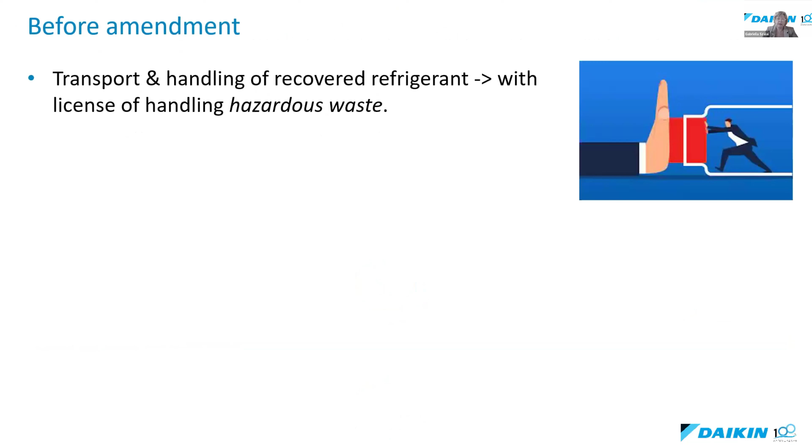Before the amendment, transport and handling of recovered refrigerant had to be done under license for handling hazardous waste. This actually meant a real bottleneck for circularity of refrigerants. Installers were reluctant to handle especially smaller quantities of recovered refrigerants due to uncertain legalities and high additional transport costs. Reclamation and disposal facilities did not accept recovered F-gases without a special transport certificate, since it needed to be transported as hazardous waste, and this also caused an economic feasibility bottleneck, since reclamation and disposal organized only over a certain volume of recovered refrigerants, which could not actually be collected due to the uncertainty of the legal situation.

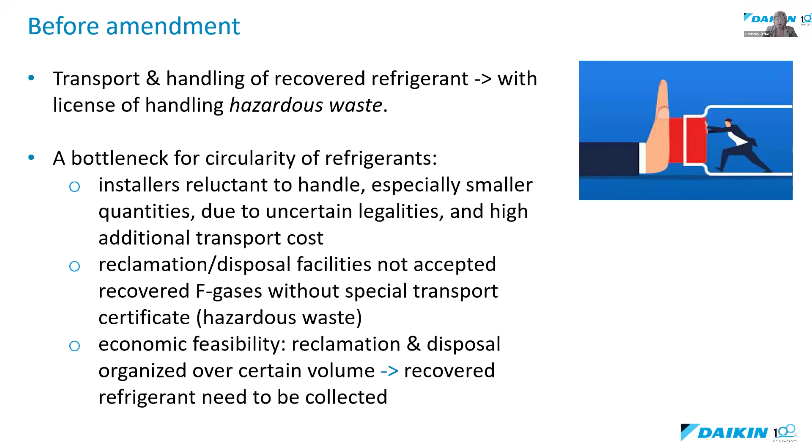Even with the previous F-gas quota phase-down, a deficit of virgin refrigerant could be anticipated according to EPEE, the European Partnership for Energy and Environment, HFC outlook model. With the augmented F-gas phase-down, a serious shortage could be expected, especially for servicing and maintenance of the existing RACHP bank. The Hungarian national expert team understood this issue.

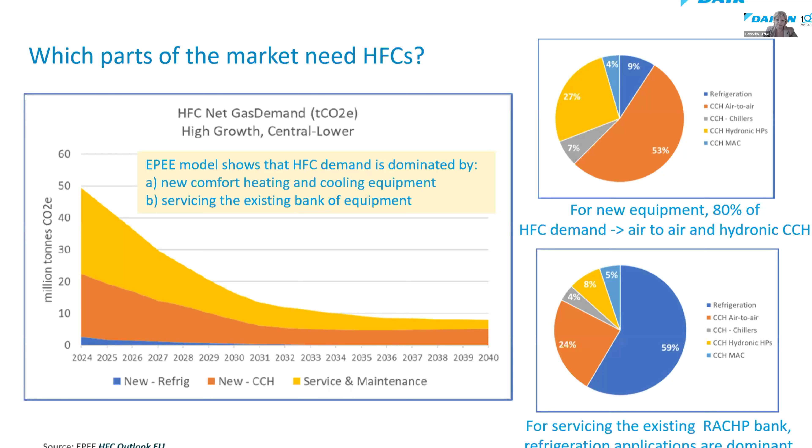They agreed that member states should facilitate the recycling and reclamation of HFCs. Recycled and reclaimed gases are outside the scope of the quota system, and therefore can assist market needs. These activities relate to the main environmental targets as well, including climate protection and environmental protection.

Advocacy efforts were made under the umbrella of the LIFE Plus program, co-financed by the European Commission. The consortium consists of 4 entities: Daikin Central Europe and Daikin Europe, together with the National Technical University of Athens and a non-profit organization called Med4Energy.

And as promised, I would like to give you an insight into how the advocacy process has been done in Hungary.

Independent legal consultants assisted the business sector, and this legal consultant was employed under the LIFE3R project. The consultant made a legal environmental assessment, which is a key part of the advocacy process. The assessment compared waste framework regulation and F-gas regulation, and this consultant was also involved in shaping the legal proposal. I initiated the advocacy process as Daikin Advocacy Manager under the EU project, and I was directly involved in the whole negotiation process.

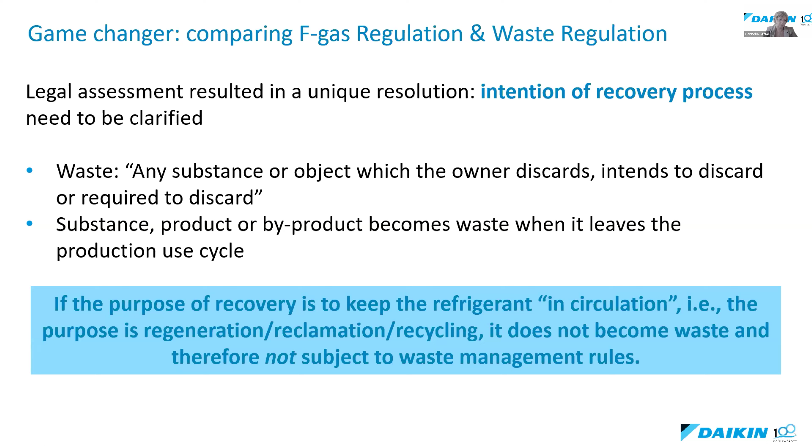Waste is any substance or object which the owner discards, intends to discard, or is required to discard. A substance, product, or byproduct becomes waste when it leaves the production use cycle. That means if the purpose of recovery is to keep the refrigerant in circulation—for regeneration, reclamation, or recycling—it does not become waste and is therefore not subject to waste management rules.

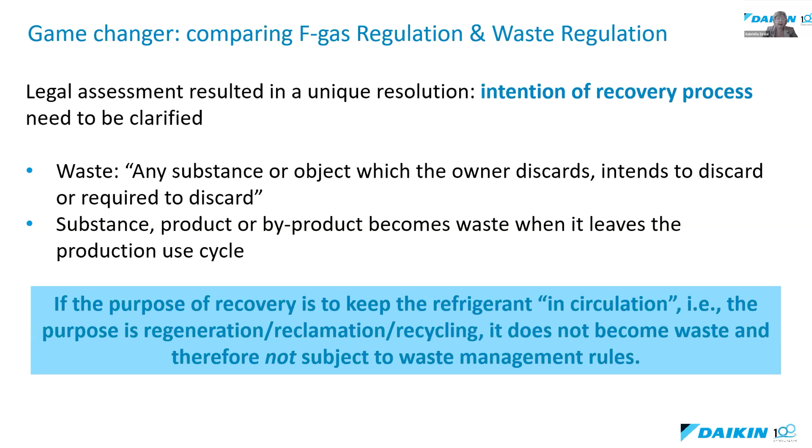This was a very important statement, which was accepted by the Hungarian expert team. That was the key behind the change of legislation, because the Hungarian national expert team agreed that if the purpose of F-gas recovery is keeping the refrigerant in circulation, this activity should not be regulated under waste management, but via F-gas implementation rules.

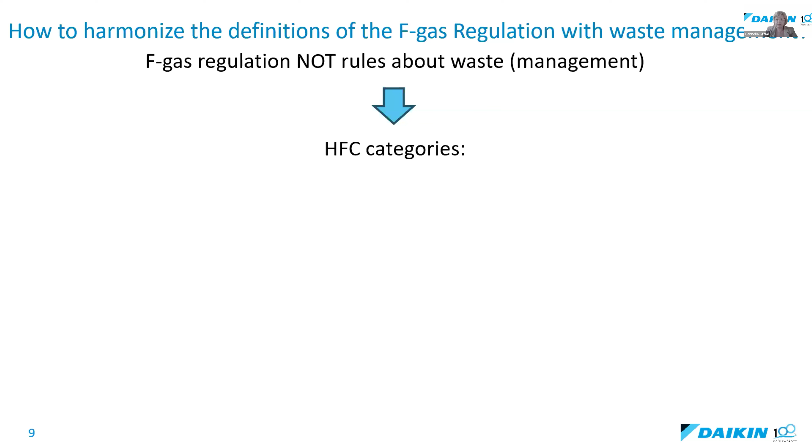HFC categories include virgin substances, recycled substances, reuse of recovered fluorinated greenhouse gas following a basic cleaning process, reclaimed substances which match the performance of a virgin substance, or destructed substances where fluorinated greenhouse gases are permanently transformed or decomposed into substances that are not fluorinated greenhouse gases.

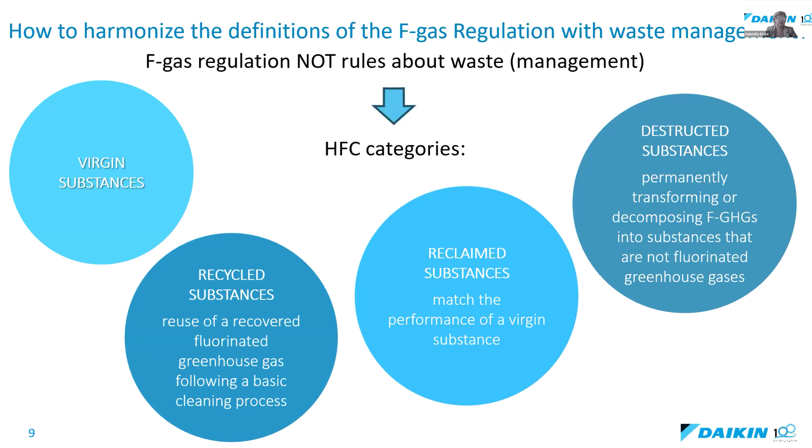It's upon the decision of the owner what should be done with recovered HFCs, and this decision determines the legal status of the refrigerant.

So, if the recovery of refrigerant is for reclamation purposes, their transport for reclamation is regulated as a non-waste activity, which is a significant improvement for the environment.

So this is the only case when the handling of recovered refrigerant remains the same as before. Recovered refrigerant is only handled as hazardous waste if it cannot be kept in circulation.

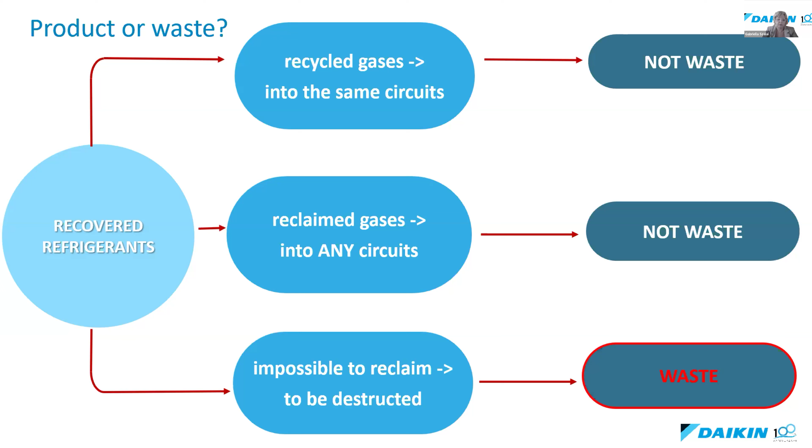So what changed? The legislation is consistent: fluorinated greenhouse gas can be transported as product, should it be recovered for reclamation purposes.

The amendment sets a deadline of 2 years from the date of recovery for the sale or transfer of refrigerant in this case, thus promoting efficient recycling of recovered gases.

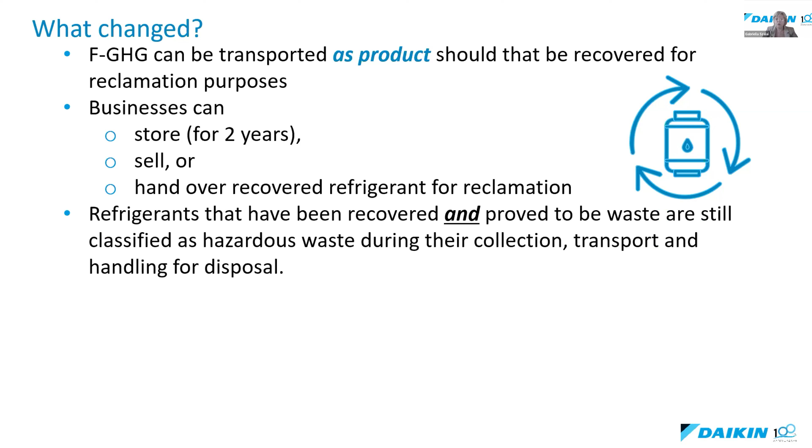The collection, transport, and disposal of recovered refrigerant that becomes waste are still subject to hazardous waste handling rules. However, in cases where companies only perform collection or transportation activities without handling gas, it is ensured that they will not have to be F-gas certified in the future.

Accordingly, the amendment creates a registration category called 'collector' that allows collection and transport without qualification, in addition to those who are F-gas certified.

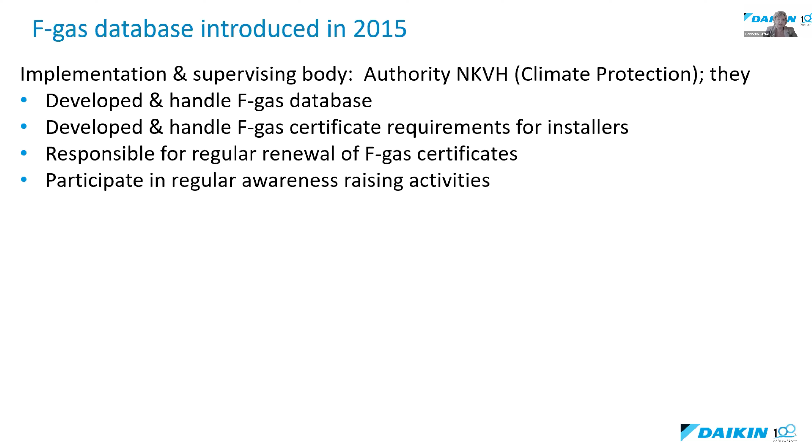When I noted that the legislation is consistent, this statement also includes the tracking of refrigerant routes. In Hungary, there is a mandatory, centralized, government-funded F-gas database. This database, introduced in 2015, is implemented and supervised by the Authority for Climate Protection. They developed and handle the F-gas database, developed and handle F-gas certificate requirements for installers, are responsible for regular renewal of F-gas certificates, and participate in regular awareness-raising activities as well. The F-gas database is also used for tracking units and refrigerants.

Routes of virgin and recovered HFCs need to be notified in the database, and this rule will be extended to HFOs and non-fluorinated refrigerants as well. Registering new HVACR units charged with HFCs and HFOs need to be notified in the database. This database also allows tracking the life cycle of this equipment.

E-logbook activities, including required leak checks, are also notified in the F-gas database, and this will also be extended to HFOs under the new amended F-gas regulation. Units also connect service and recovery activities — the F-gas database connects service and recovery activities to units.

And all these current requirements are expected to be extended to non-fluorinated refrigerants from next year on, including training requirements for installers as well. The F-gas database needs to be regularly updated — maximum 8 days after any database-related activity it needs to be reported — and leak checks are mandatory according to F-gas regulations. Missed reporting of mandatory activity is fined by the Authority for Climate Protection.

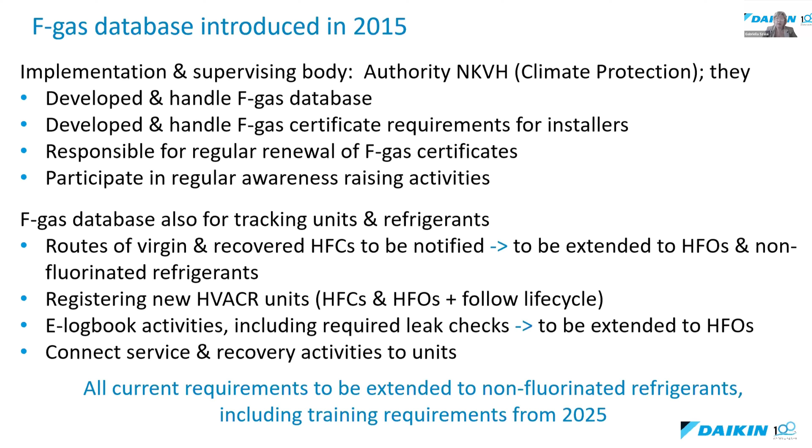With the amendment, the implementation rules and changes in the F-gas database also added concerning reporting on unknown recovered blends. That means that unknown blends, for which the exact composition is not possible to determine, are allowed to be set at a later date when the proper composition can be noted, and then it can actually be notified in the F-gas database as well.

Amending the regulation is a significant step for refrigerant circularity, but awareness raising and market and stakeholder education is also very important. Installers and service companies need time to adapt and also need credible sources to learn from. Therefore, extensive awareness raising is still necessary. The Hungarian expert team also understood this need — they regularly participate in events and conferences, during mandatory installer trainings as well, and they are actively part of market education, which is very important for all installers to understand the amended rules.

But we also experience new business opportunities occurring for refrigerant circularity. For example, a leading reclamation facility increased its capacity — formerly it reclaimed only non-flammable, A1 type refrigerants, and now they have extended their service for A2 type refrigerants as well. We also noted that a new reclamation facility launched in Hungary — a formerly dismantling-only facility now offers newly founded reclamation services, including A2 type refrigerants as well.

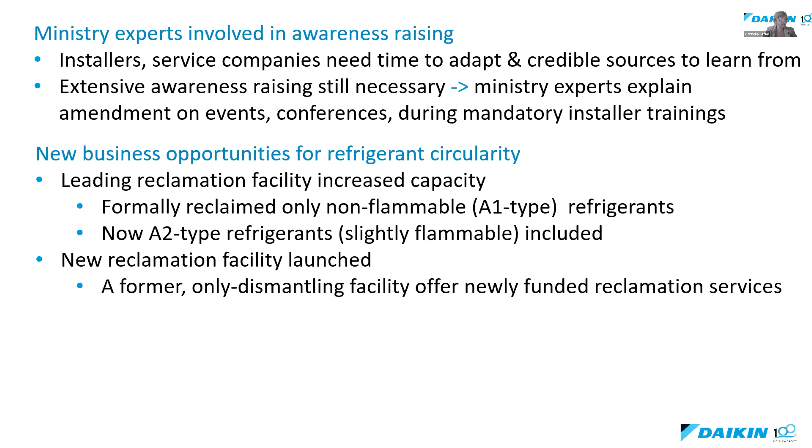And as interesting examples, we have take-back schemes from L∞P by Daikin and the Retradables platform. You will hear more about these take-back schemes from my colleague Hrvoje Krapanic, who will follow me in the presentations.

And I will give you the names of the team responsible for the change of regulation. First of all, the Ministry for Energy Affairs, Climate Policy Deputy State Secretary, Ms. Daniela Deli, is the Deputy State Secretary — you see her email address here. And also, again, I would like to give great applause to the Authority for Climate Protection. This is a very capable team, together with Mr. István Glück, Hermina Gordon-Kiss, and Ivan Szabó. They were great in helping with all the changes which happened in Hungary.

Now I will resume my presentation and have time for questions, I think. So please feel free to let me know if you have anything to ask from me. I would like to stop sharing now, and then I will see you if you have some questions.

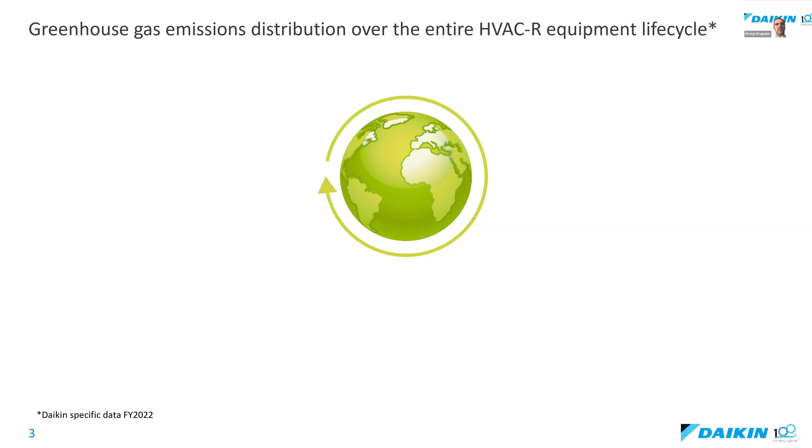So let's see how it looks like with the average HVAC product in the equipment life cycle. What happens with the CO2 emissions in the product life cycle?

Basically, when we talk about raw materials and transport, which includes procurement of parts, logistics, and people movement, we talk about 1% of the emissions connected to the product. Further, the production, manufacturing, development and sales processes account for 0.4% of the CO2 emissions.

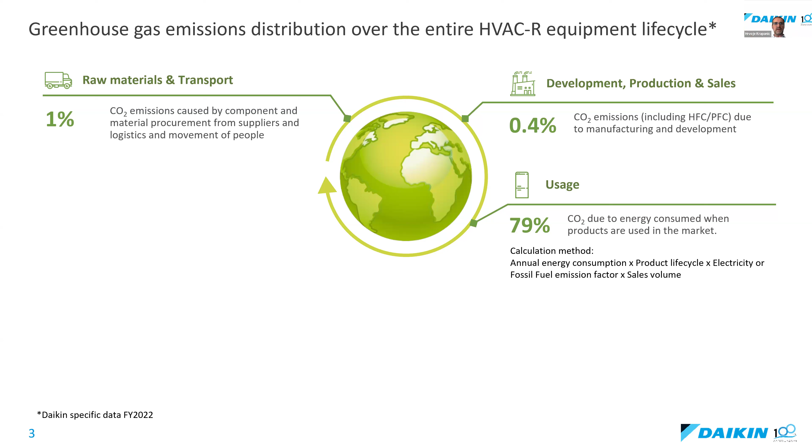Then we come to the usage phase. During the usage phase, we talk about 79% of the CO2 emissions. So for one product, during the phase of use, we are facing 79% of the CO2 emissions connected to the product, and that's mostly because of the energy consumption happening during the use phase.

At the end, we have refrigerant emissions during the use phase and end of life emissions. Both CO2 emissions connected to the refrigerants amount to, on average, 19%. So if we talk about the last two, usage and refrigerant emissions during the use phase and end of life, we talk about approximately 98% of the CO2 emissions connected to the product.

When we talk about this 19% of emissions connected to the refrigerant, we still have to assess it in detail, but the first assessments say it's like 50% connected to the phase during use, connected to potential leakages which can happen during the use phase. End of life is also part of the emissions which are happening.

This is because of incorrect recovery. In our calculation, the recovery rate is set very conservatively to 0% because the market data is not there. So we assumed in this calculation there is no actual refrigerant recovery, which is not true, but refrigerant recovery and reuse is still at a very low level. This is why I think refrigerant handling is extremely important due to this factor.

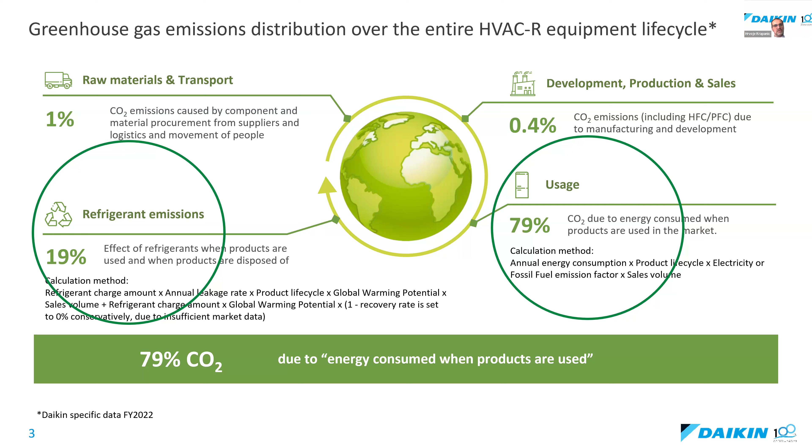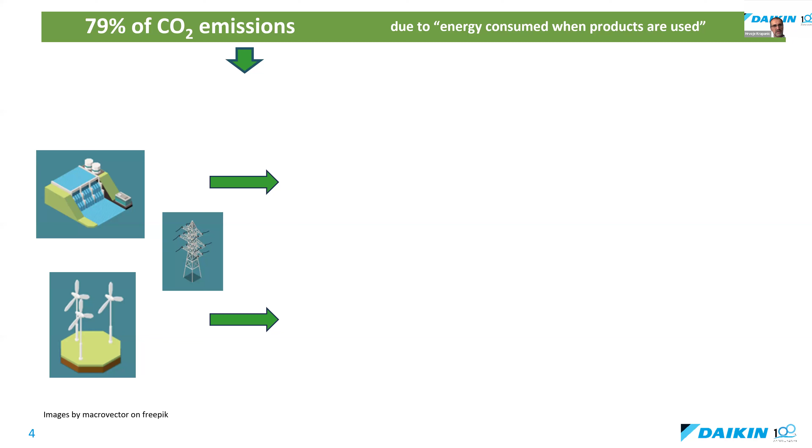So 79% of CO2 emissions connected to energy consumed. Let me divert a little bit from the topic and explain what happens here. Basically, this is the electricity which comes to the building for every purpose, but a big part of it is used for heating and hot water preparation and for cooling. Here, the example is a heat pump where we are using this electricity to start this heat pump.

And then, as we talk about renewable energy, we have 3 kilowatts of free energy coming from the ambient, the renewable energy. At the end, we get 4 kilowatts of heating energy. So basically 1 kilowatt input of electricity, and at the end we get 4 kilowatts of heating.

Of course, I've been very optimistic and put the pictures of renewable energy sources when producing the electricity, but in reality this is not so. Electricity is still being produced in a big percentage from fossil fuels. So basically the 79% of CO2 emissions comes from the energy. If we are decreasing the CO2 emissions from this energy, we will be decreasing the CO2 emissions from the use phase of the product.

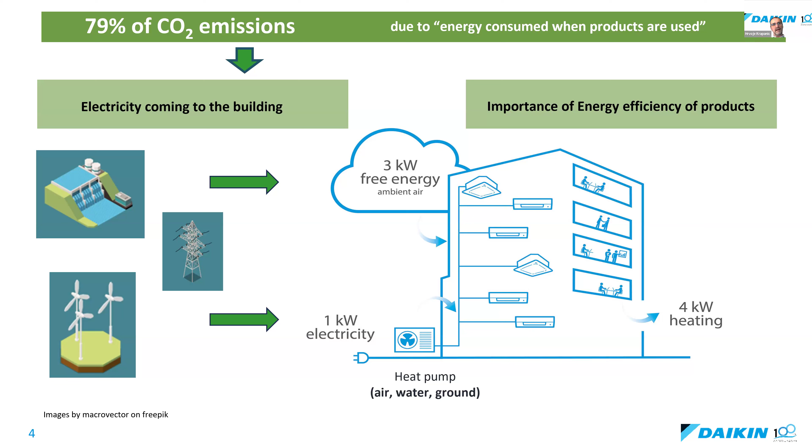That's why it's important to keep high energy efficiencies, products with high energy efficiencies, and of course products which produce renewable energy, when we think about decarbonization and reduction of CO2 emissions in general.

Now I would like to run through basic definitions which I will be using through the presentation. I'm sure you know it, but let's repeat a little bit.

The recovery of the refrigerant is taking refrigerant from the equipment to some bottles, cylinders, tanks. The point is that every refrigerant should be taken out of the equipment and taken care of, meaning we have to strive to reuse it. If not possible, then to destroy it. This applies to every kind of refrigerant, including the natural refrigerants, which are more and more taking place on the market.

Recycling of refrigerant is actually basic cleaning of the refrigerant, and the refrigerant should not be too contaminated, because the basic cleaning is removing oil, acid, particulate matter, and water. Such cleaned refrigerant can be used in the same or similar equipment. Good practice, according to European standard 378, says that every time refrigerant is recovered from the unit, before putting it back into the unit it needs to be recycled.

But we all know this is not really the case, and that's why I think we have to make sure that people know this is needed, and that it's preventing accidents and prolonging the life of the equipment.

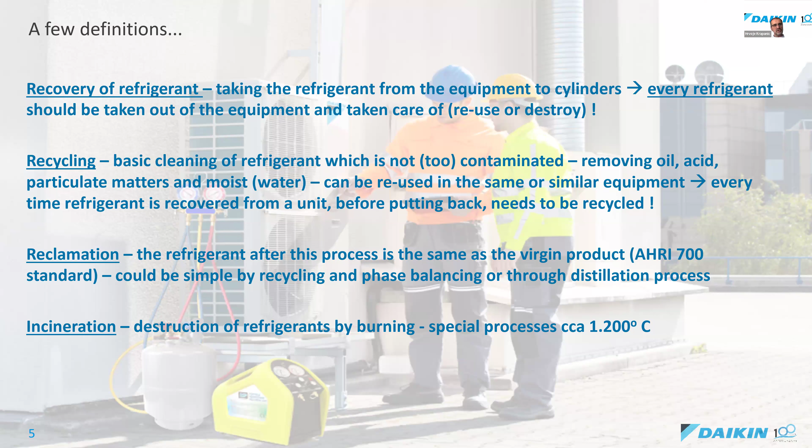I can show you a picture of our facility at Daikin Refrigerants in Frankfurt, Germany, where we have the reclamation facility. Shortly, this is the process where we separate the different refrigerants from one tank and put them in these big columns.

It's very interesting how the process looks. We're talking about a process that goes over six floors, I think, so it's really impressive how it looks. And at the end, we do have...

Good experience with that. A little bit of a challenge here is getting the big quantities of refrigerant required, which needs to come in bigger tanks like ISO tanks, which is not always easy to collect on a specific market.

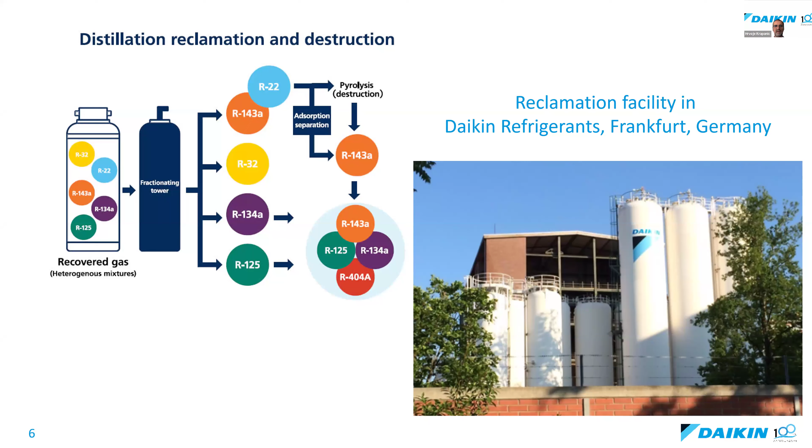So coming back to this, refrigerants and their connected CO2 emissions. When we talk about the life cycle of refrigerants, part of this is we have to make it as sustainable as possible.

So basically, the refrigerant comes from the first moment to the equipment, so it's filled in the equipment. Then during installation and the use phase, we have to make sure the refrigerant remains in the unit, so it's important to have good quality installation.

During the use phase, we also have to make sure our units and equipment are maintained properly, so we keep the proper functionality of the equipment. And at the end of the lifetime, we recover this refrigerant from the unit, and this is the part we are talking about today mostly.

So basically, we take out the refrigerant from the unit. We recycle or reclaim it, cleaning and processing the refrigerant, and then we can reuse it again, putting it back into the system, or in the case of reclamation, we can use it in the original charging of equipment in factories.

If this is not possible, we can destroy the refrigerant, properly disposing of it. But the idea is to reuse refrigerants as much as possible, because this is the sustainable way.

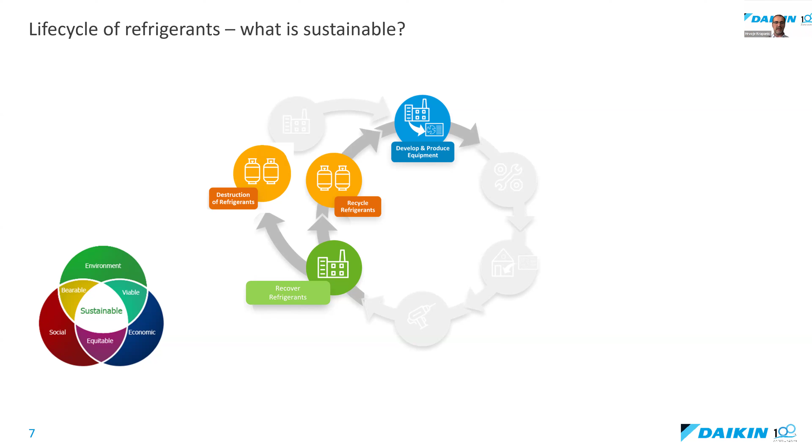So we call it a circular economy of refrigerant. And of course, this prevents releasing refrigerant into the atmosphere, because this is actually still happening quite a lot.

What might be the challenges to having successful circularity, a circular economy of the refrigerant? Recovery is very easy - you take out the refrigerant and put it in cylinders or bottles, but what to do with it? Where do we get these cylinders from?

Is it, do we lease it? Should we own it? These are challenges for the installer. Then how to transport those cylinders to wherever the transport needs to be done. Having the Hungarian example in mind, what you heard from Gabriela, we sometimes have challenges with the legal framework in a country.

Then, where to store the refrigerant, if it's even possible to store it yourself at all. Do we have a place where we can take the refrigerant for further reuse, recycling, reclaiming, or destruction? And what are the costs for the installer in such a situation?

Some easy things to think of: local regulation must be adapted to the premise that when we recover this refrigerant, this refrigerant recovered from the unit is not waste immediately. When we have this perception, things become easier. Then it becomes a valuable resource.

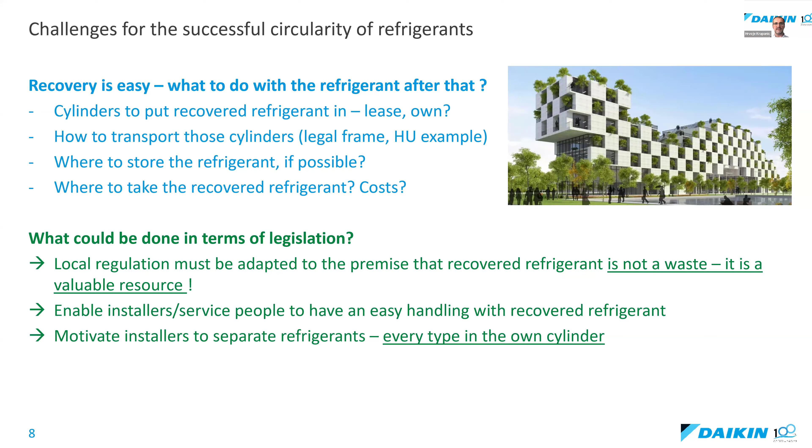How to start? We still need to do a lot of market education. I'm not just talking about your countries, but also European countries still. We still have work to do, because the importance of these RRR processes is immeasurable.

Because of environment protection, we are keeping the refrigerant in the systems where it belongs. We are reusing resources, so we do not produce new refrigerant at the scale we normally would. This is money saving. Overall, it's very important that the market recognizes this is very useful. The certification, as you know, functions in your country also, but the point is to control these F-gas certificates, which companies and people have.

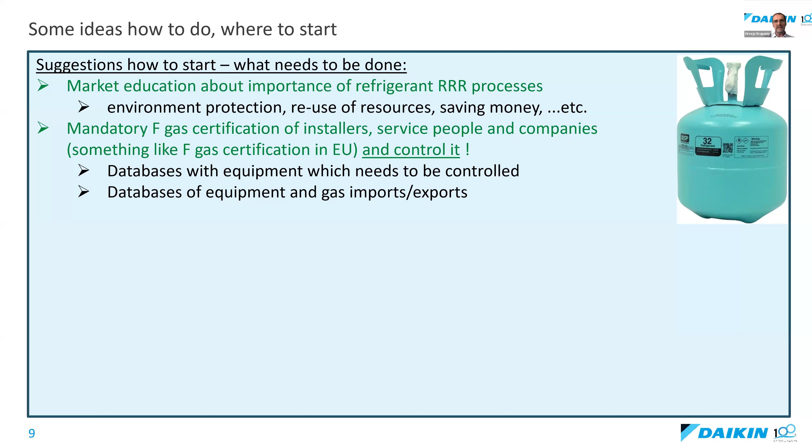Then we have the possibility of having electronic databases with equipment, which again needs to be controlled, and databases with gas imports and exports. We have a good example in Poland. Professor Kozakiewicz already gave a presentation of their databases. I think these are very useful to know and to have.

Then, of course, updated legislation is needed to enable and really support the circular economy of refrigerants, like Hungary did. A lot of European and EU countries should do it as well. It's not common yet; Hungary is still one of the few countries. It's important to understand that refrigerant is not waste, but a useful resource, as we see Hungary succeeded in doing.

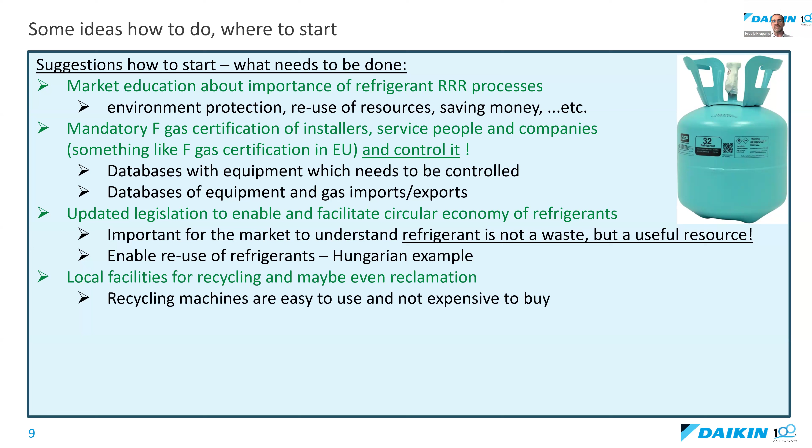Of course, the presence of local facilities or local machines for recycling, and maybe even reclamation, is also helping, depending on the quantities and size of the market. Recycling machines are easy to use and definitely not as expensive as the big reclamation facilities.

One piece of information I'd like to pass along: at a meeting in Bangkok in October, there will be a workshop on refrigerant management done by our colleague Hilde Dhont as part of life cycle refrigerant management. This task force will be organizing the workshop. So I'm inviting you, if you're going there, to visit and participate in the workshop to get the full information and have an active discussion on that.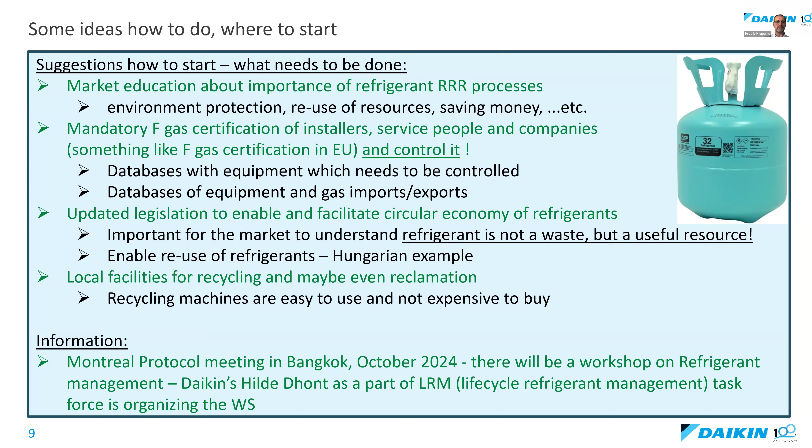So what could be good practice? What are the good examples we see, also from the sales point of view? Enabling the use of recycling machines for local service companies is definitely helping. Not every service company can afford to have a recycling machine, or even wants one, so having this put regionally by some bigger distributors could be a good idea.

This is done in some Central European countries, and we are still getting used to having this, but as mentioned, the service of the units is very important. Service crews offer recycling on the spot. This is also a very important part of the sales argumentation, so the quality of the service could be the one: we are also recycling for you.

Cleaning the refrigerant can be a good advantage on the market from the sales point of view. And to organize, for example, equipment and even refrigerant take-back schemes, where we offer for the old units some kind of voucher, because we make sure the refrigerant inside is going to be recovered and reused. Companies which collect such equipment extract the refrigerant and give back a certain compensation. So centrally, the refrigerant is collected and cleaned, regenerated in a way, and put back to the market, or if not possible, properly disposed of.

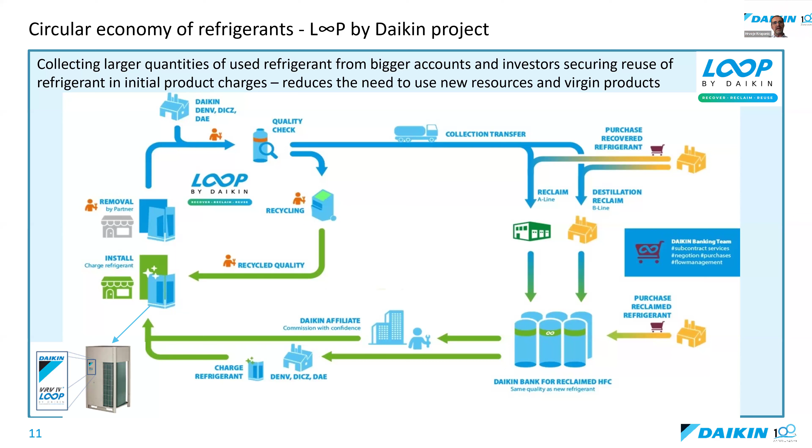Then after the quantity is reached, it's transported to the facility, cleaned, reclaimed, and then put back to production, where in our case we have complete lines of products which only use this reclaimed refrigerant. So no new refrigerant, just reclaimed refrigerant. This is the management, and this is the circular economy which we established in Europe.

The second one is the project called Retradeables. Gabriele already mentioned this a bit. It's a project co-funded by the European Commission under the LIFE project. The project aims to make sure that small quantities of refrigerant are not forgotten. So let's say the refrigerant ends up in a certain cylinder or bottle with an installer, and the installer may not know what to do with it, either to destroy it or just store it.

We had examples where installation companies were keeping the refrigerant stored in their warehouses for years, not knowing what to do with them. We offer the possibility to put such refrigerant cylinders onto a platform, kind of an e-commerce platform, where on the other side are refrigerant distributors who buy or take such refrigerant, collecting bigger quantities, and then process, recycle or reclaim it, and put it back to the market. So this is meant for the local reuse of refrigerants.

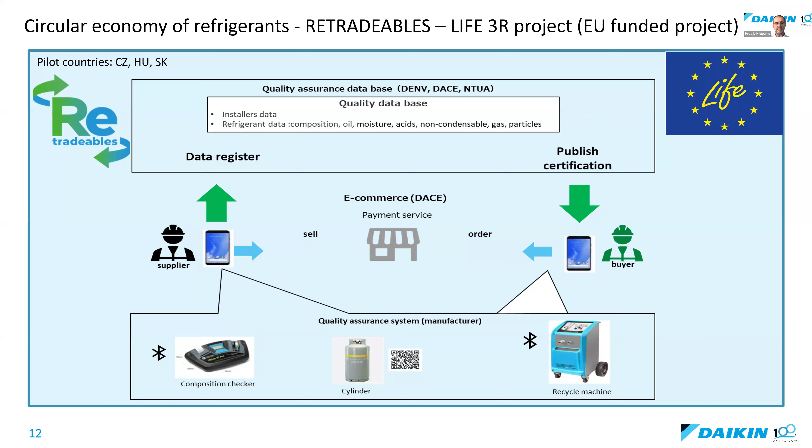So that would be everything from my side. Thank you very much. The idea is to pass on a good message to take care of the refrigerant throughout its life cycle, because we have huge quantities of refrigerant already on the market, much bigger than all the new quantities coming in. I think this bank of refrigerants already existing is really worth using and reusing, protecting the environment while at the same time saving money and reducing CO2 emissions. Thank you very much.

Thank you. Thank you, Hrvoje. Firstly, congratulations to Daikin for celebrating its 100th anniversary. Thank you very much, so quite an accomplishment.

I enjoyed this interesting and relevant intervention with focus on the industry position. You noted the challenges for the successful circularity of refrigerants and the steps on what could be done, which I think could definitely be of interest to many countries, because such questions tend to arise during regional meetings, events, sessions and panel discussions. Yes, legislation is an important component, but also, as you mentioned, the roles and responsibilities of stakeholders during the sustainable life cycle of refrigerants. This also goes back to Ms. Gabriela's presentation, and thanks for sharing the two take-back schemes by Daikin. That was also quite interesting to hear.

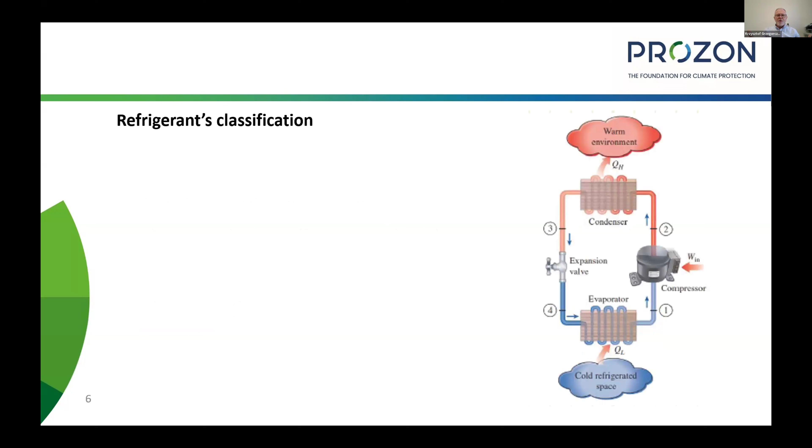So in a simple classification, we're talking about refrigerants that are ozone depleting substances. As Prozon, we started in CFC's time - actually 25 years ago, Prozon started activity. Then we had to work with HCFCs. And like 10 years ago, the release on using HCFCs in refrigeration was stopped. So from that time, we are just dealing with F-gases.

There are easy to manage F-gases like 134A, single component. And we discussed a bit about mixtures before that are more difficult to reclaim and to handle. In those mixtures, we have to say that we can have two different types of refrigerants, like 404, which is zeotropic, and 507 that is azeotropic. So it's easier to keep the composition with all the refrigerants starting with 5.

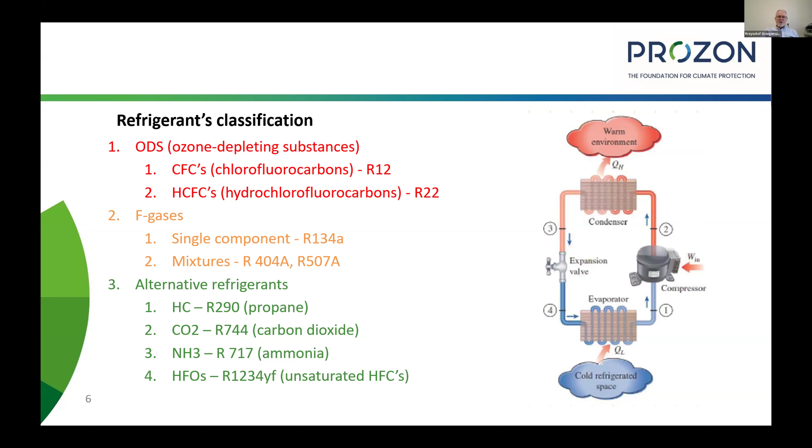But our objective full focus is now on F-gases. The historical approach is that, after 100 years of different changes, we're coming back to so-called natural refrigerants that were in the 30s replaced with CFCs that presented a lot of advantages: safety, availability, acceptable pressures.

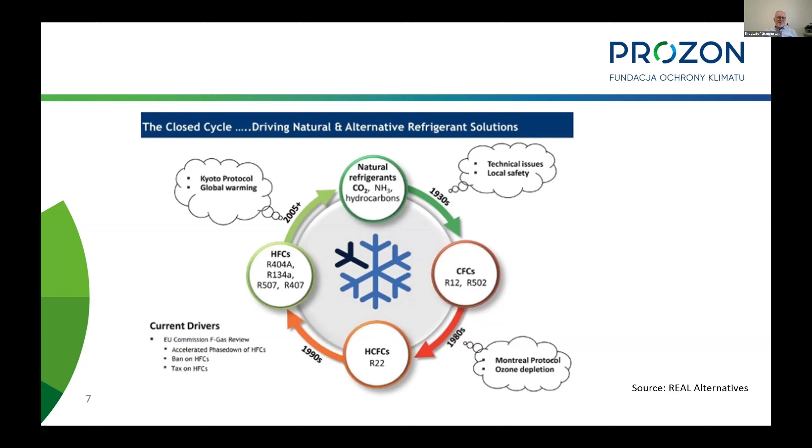But then, of course, we had a Montreal Protocol. We had a middle step to use HCFCs. And then I remember those times because I was introducing also HFCs after. And I think that it was a kind of a little bit wasting of time. And whatever now is the ban, there is a ban on HCFCs or phasing out. It's absolutely all the technology to go back to natural refrigerants without this middle step. I think it's a perfect opportunity. We, as Europe, we went through the process from HCFCs to natural refrigerants via a huge amount of greenhouse gases like HFCs. So it's good to skip this step.

Recovery, I mean this definition from European regulation 517 in bold - simplification of recovery is just the process when we take the product from air conditioning or heat pump or refrigeration unit and we put this to a cylinder. Cylinders should be specially marked, should have a special valve, and this is differentiating product virgin or purified product to use from the product that is recovered. So wherever you're introducing a 3R network, make sure that you're introducing proper cylinders to the service network.

Reclamation is generally saying removing impurities above AHRI 700 standards. This standard was already mentioned. We don't have European standard, and this standard, I have to confirm, it's good enough.

Recycling, it's a process that I interpret as basic cleaning, removing basic impurities. Of course, we don't know the outcome of this recycling process. We can imagine that the recycling process can be a small filter and a huge amount of very humid refrigerant with a lot of water. And of course, such a process of recycling is not improving the quality of the refrigerant at all. And unfortunately, we don't have simple measures to test the results of basic cleaning.

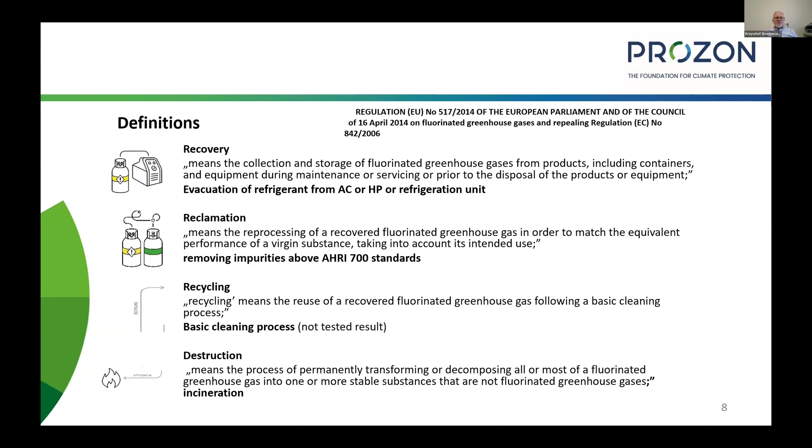So the life cycle of refrigerants you have seen, we're starting with a refrigerant that is a quality product and should be charged to the equipment. As mentioned in the Daikin presentation, 79% of the emission of greenhouse gases happens during the process of using the equipment in operation. So what is the consumption? The consumption depends on the quality of the equipment, but it's also a quality of refrigerants. That's why our perspective is that the quality of refrigerant we put in the system is extremely important to the long lasting of the equipment and also the effect on the environment.

The process of recovery is sometimes very simple, sometimes more complicated, especially in industrial systems, but usually the average service person has the knowledge how to do this and has an obligation, because having a certificate, he has to pass the exam that he knows how to use the recovery machines and recovery cylinders.

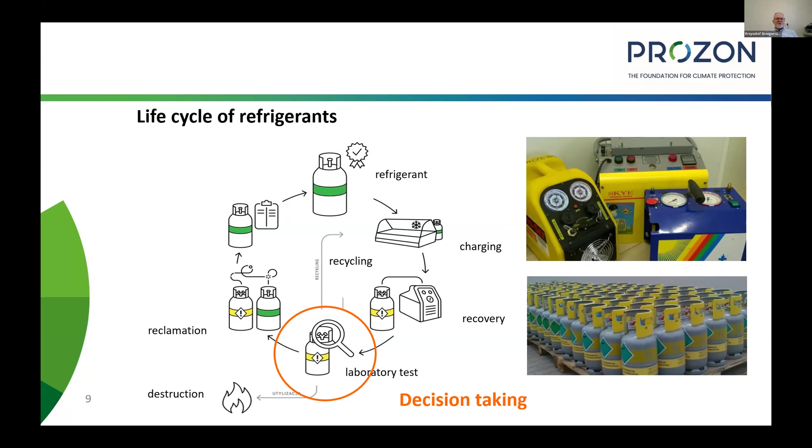Reclamation is the process we're using, called distillation - though indeed distillation is a different process when separating refrigerants, but that's the term we use very often for the equipment widely used for reclamation. Then the product has to go back to the lab, and the lab, using ARI methods, gives a certificate, and the product with the quality of the virgin product goes back to the system.

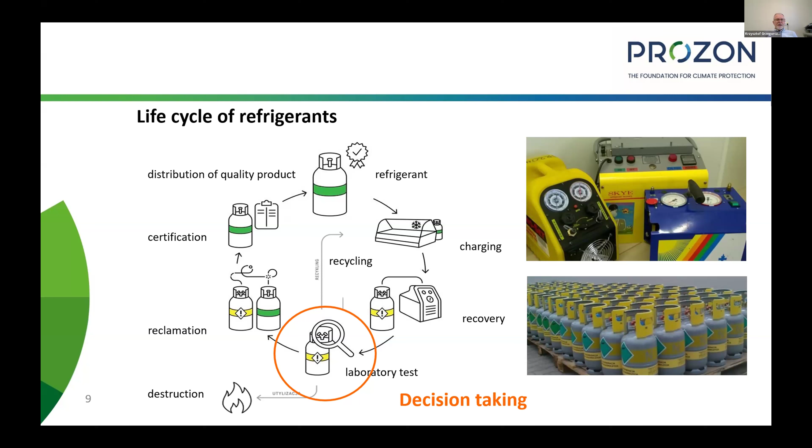Those are the sources of the refrigerant.

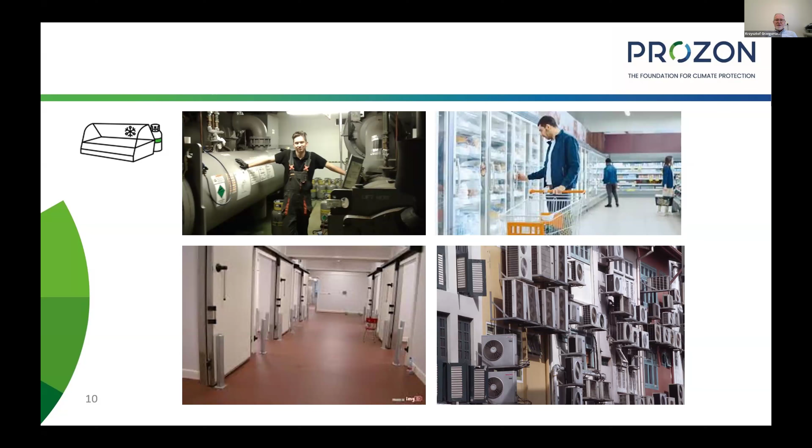Emilia, your hand is up - would you like to ask me now? Raised hand of Emilia - sorry, I forgot. No problem, sorry, okay, I thought you wanted to ask. If somebody wants to ask a question in the middle of my presentation, please feel free to do this.

Okay, the process of recovery - you can see different types of recovery machines, different types of packaging we're using for recovering.

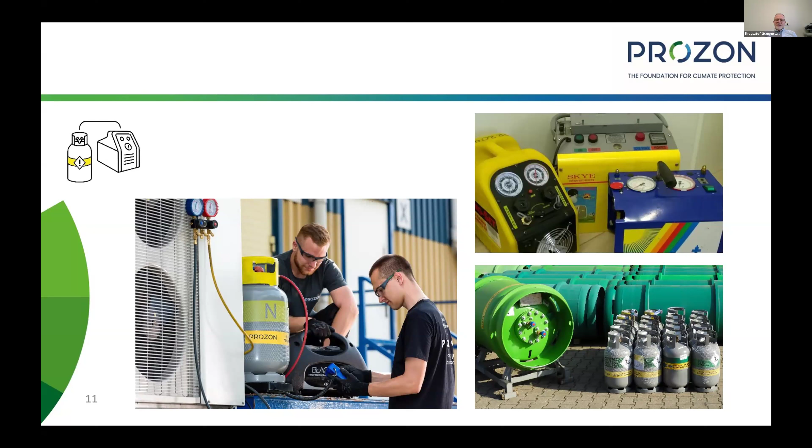I wanted to say two words about the team of Prozon. It's always good, and I'm always recommending, that a reclamation center has its own service personnel to do the difficult evacuations, so our team is busy all the time, as standard service people do not take on this challenge of recovering refrigerant from every installation.

The lab has to take a sample. You can see Martina taking a sample, and then a set of different parameters according to standard has to be performed.

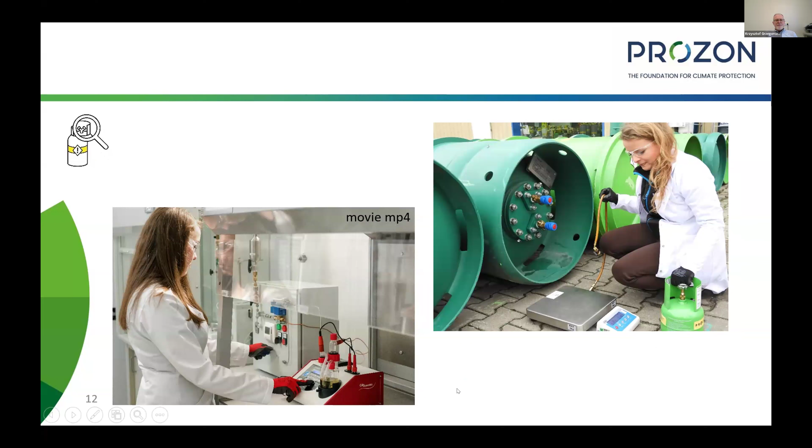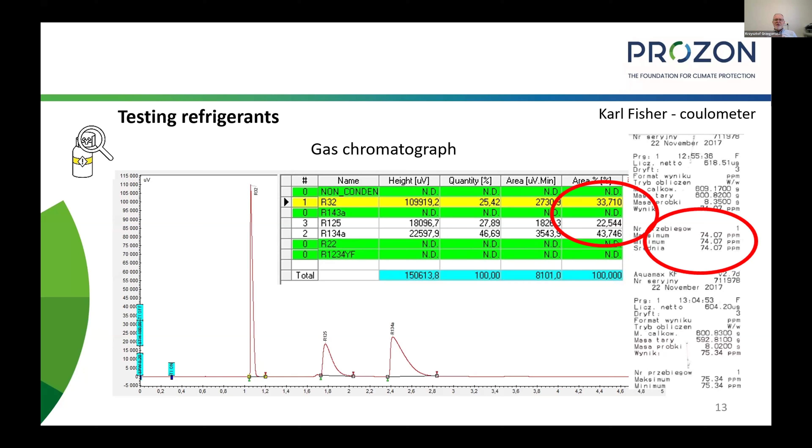On this picture you see the testing - this is a Karl Fisher equipment to do the analysis of the moisture. You can see the composition of refrigerant in multi-component refrigerants - you have to use a gas chromatograph, and for example on the right is the printout from Karl Fisher, where you can see the amount of water before reclamation.

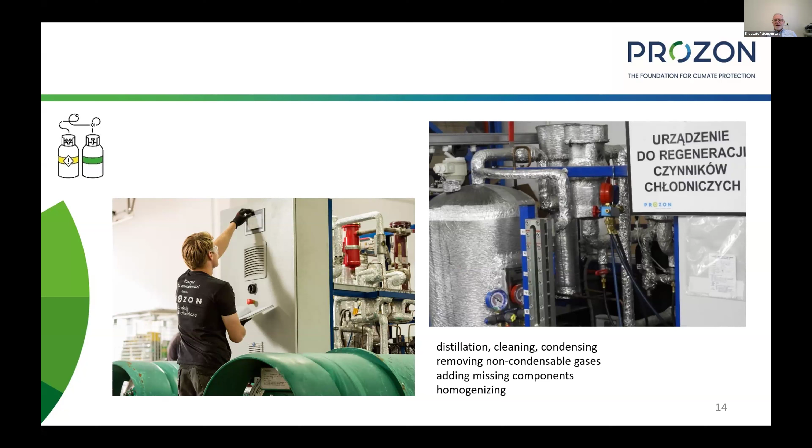Next, after removing the impurities, we have to add missing components when talking about multi-component refrigerants. We have to homogenize before we take the sample, and we're repeating the process as long as we're reaching the ARI standard.

So we're testing in the lab. When the product goes back to the lab, we're testing nominal composition, water content, acidity, high boiling residues, chlorides, non-condensable gases, and solid parts.

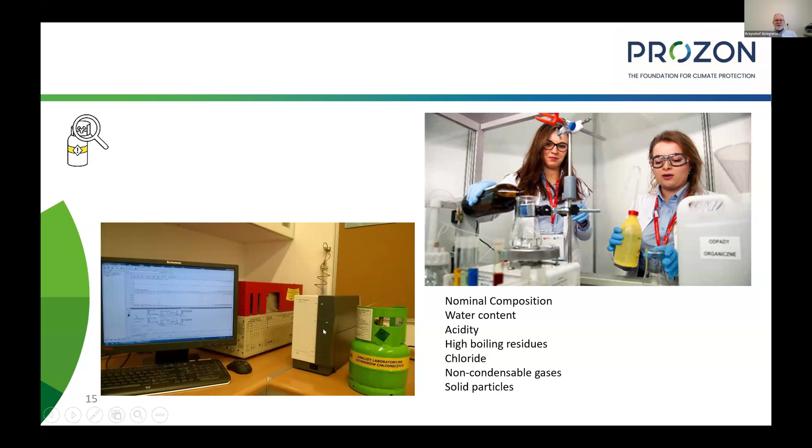Quality after product reclamation - we're bringing the right composition, and we're bringing the quality in terms of the water content also below 10 ppm, which is the ARI standard.

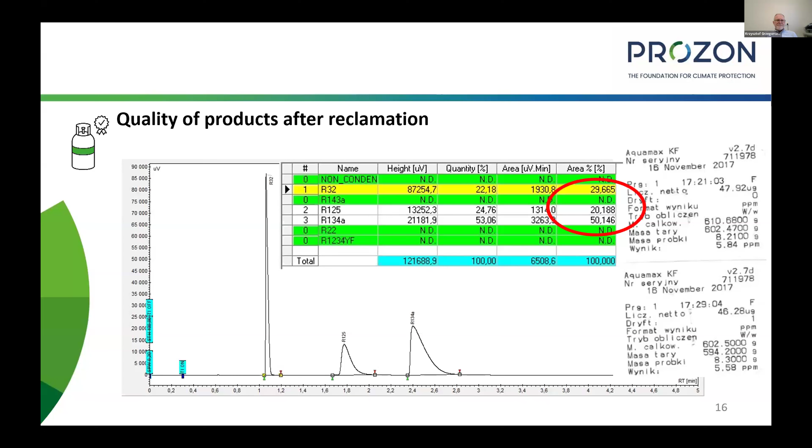Last year, it's a brand new investment of Prozon. And we're actually coming to the point of my presentation.

Part of this reclamation process that we were not able to perform before is something that happens in Daikin in Frankfurt, an installation to separate products. We have a little bit different approach than Daikin - we're not separating to single components, but just removing additions that are not necessary in the equipment, which from our point of view is less energy consuming. Sometimes it's one product that is unnecessary or unwanted in the recovered refrigerant, and with distillation and adsorption methods, we can remove this.

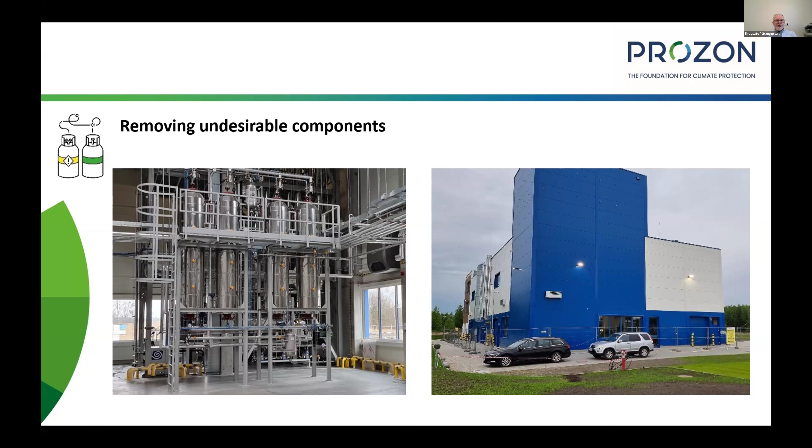I will show this picture again when we talk about trading of the recovered gas. Of course, there is a lot of logistics - the product has to come from the market to the plant and has to go back to the market. But the good stuff is that this is a quality product, sometimes better than the virgin product.

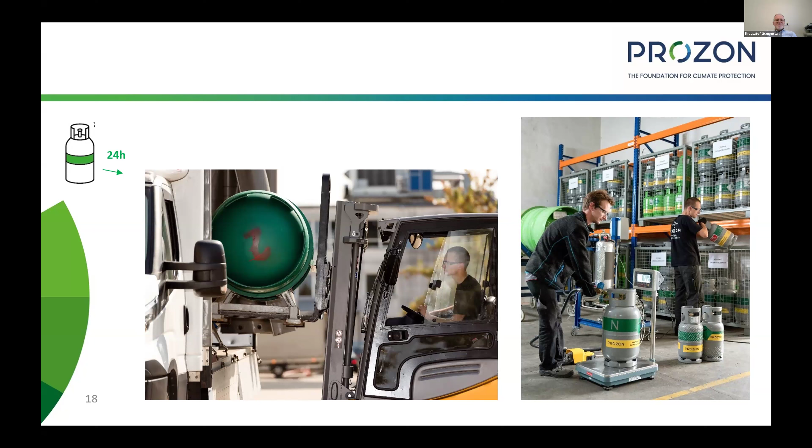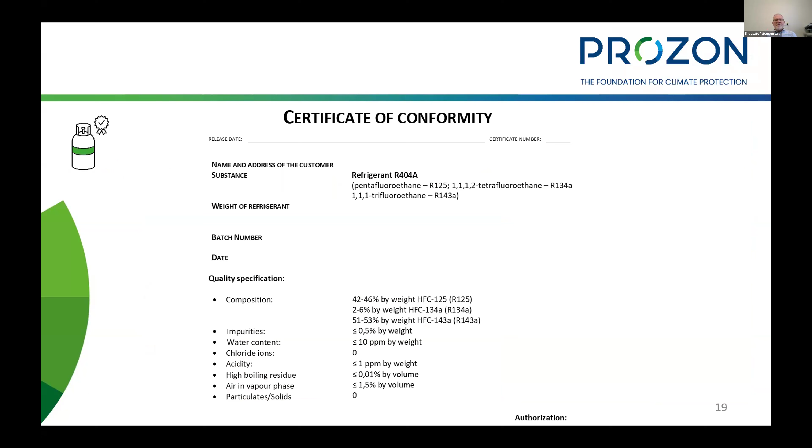We confirm with the certificate of conformity, and we show all the parameters required by the ARI standard. We don't release the product to the market without meeting those standard minimums.

And now, this invitation for this meeting was somehow a trigger to think about a special offer that we in Poland can give to other markets, without limits in incineration or in reclamation of refrigerants.

So actually, we're starting from the left. The question is, what can we do with collected refrigerant waste? We have a mix of refrigerant in - it can be an ISO tank, 1-ton container, or cylinders. The only requirement should be that all those packagings have a Pi mark, which is required in Europe as a safety standard. So that's the requirement for the packaging.

Actually, I would say it's good to have because then it makes the transportation within the European Union easier. Okay, maybe it's not strictly necessary.

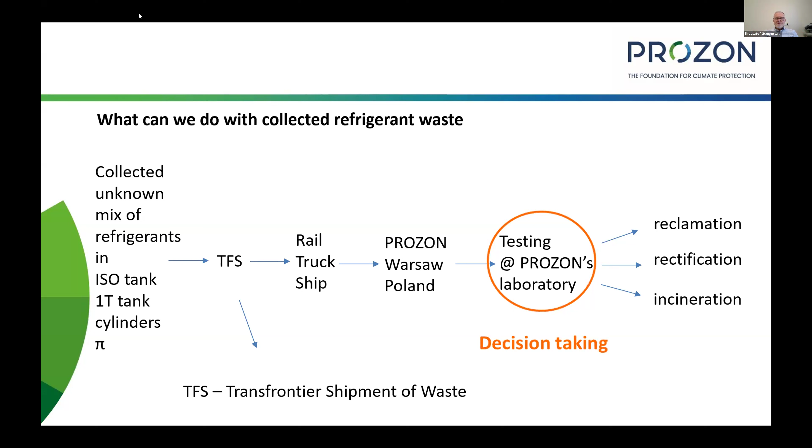What next? So reclamation, of course, is a process of removing oil and impurities. Separation is removing unwanted components. Both processes we have to complete with a quality certificate. And of course, destruction is a completely different option. But luckily, we are lucky in Poland that we have an installation that can do this. So we are in a perfect situation - Prozon is in a perfect situation. Now we can do all three of those processes, having them completed.

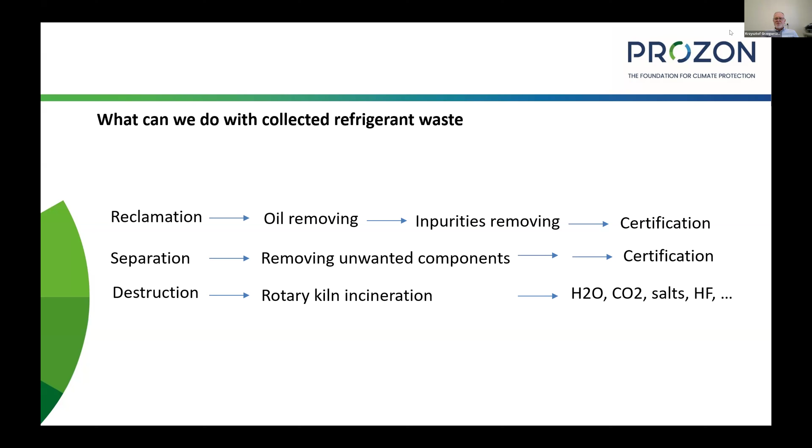I'm showing again this plant close to our capital, close to Warsaw. Some of the participants of these meetings had an opportunity to see this already. I'm very glad, and I would like to share this happiness of having this with all of you. So if you would like to see such installation and operation, then you are invited.

So we're calling this a 4R plant, which is a little bit of an extension of the 3R plant, right, and 3R network. So we start talking about recovery, reclamation, rectification, and at the end of the day, it's going back to the market and it's reuse. It's the term that's close to circular economy, or anyhow...

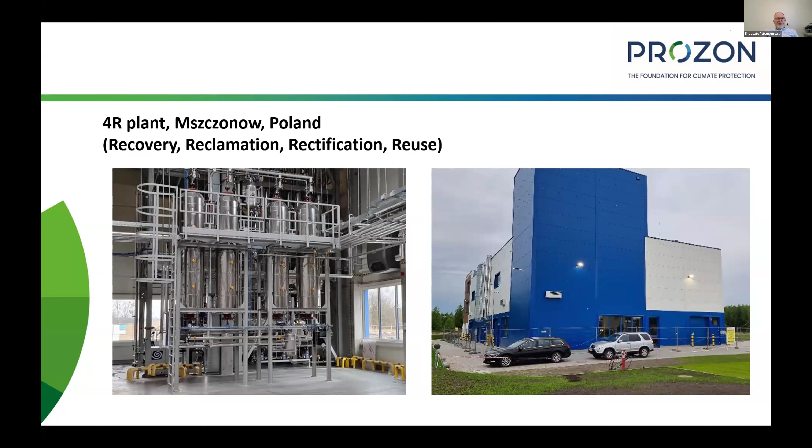This is the process where a mix of refrigerant from any country worldwide can be treated. And I want to show you the other plant, called Sarpi, which belongs to Veolia - quite a global operator of such installations. This is a rotary kiln incineration plant.

Excuse me, we still have some construction works next to me. Excuse me very much. I'm sorry.

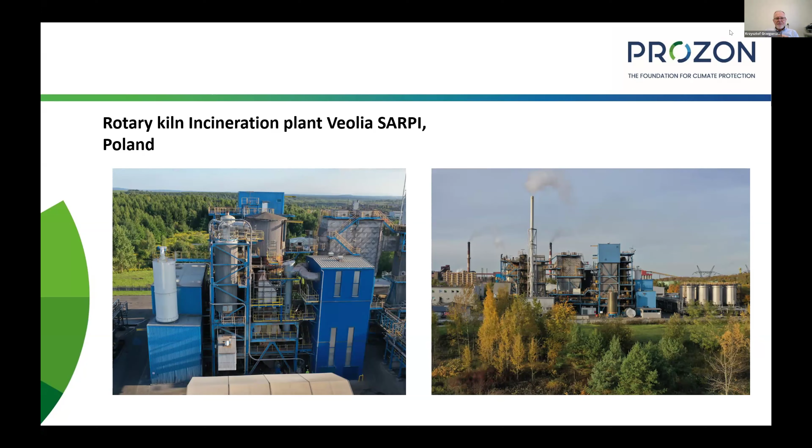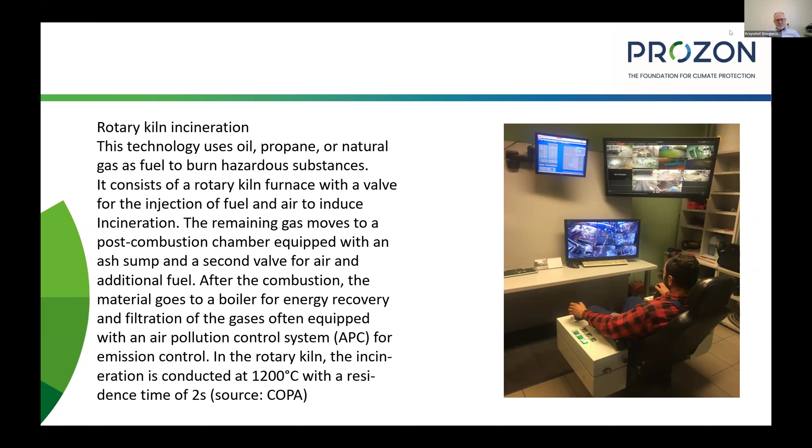I will not go into details about rotary kiln incineration, but I will leave this in the presentation for sharing. Incineration is conducted above 1000 degrees centigrade. This is a widely used process for different substances, including hazardous substances, and can be propelled with oil, propane, or natural gas. So this is a quite modern and efficient installation.

Getting prepared for this presentation, I looked at COPA documents, and they present a whole list of different reclamation installations around the world. I believe there were 179 reclamation places. The biggest amount is in Japan, but in Europe we still have some installations, and there is also a list of all the places where you can destroy mixtures of CFCs or HCFCs.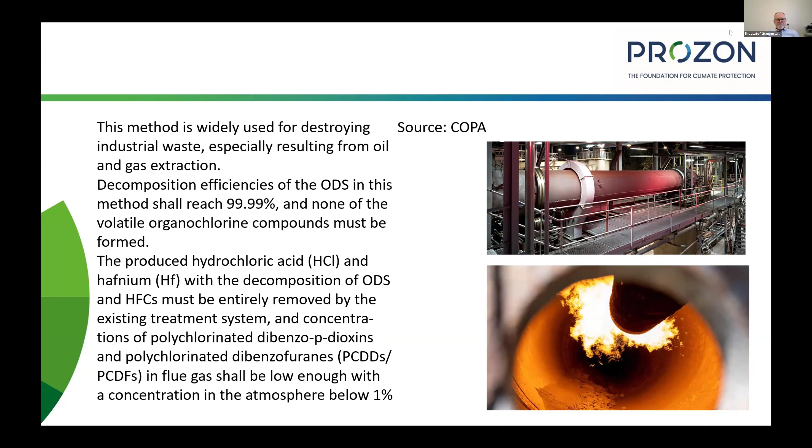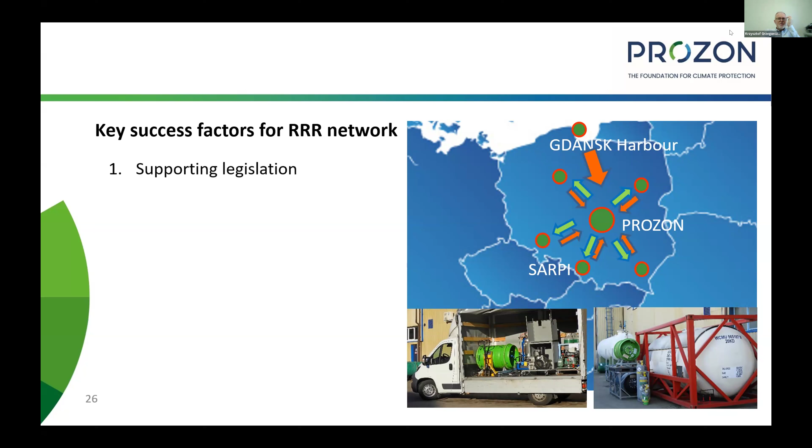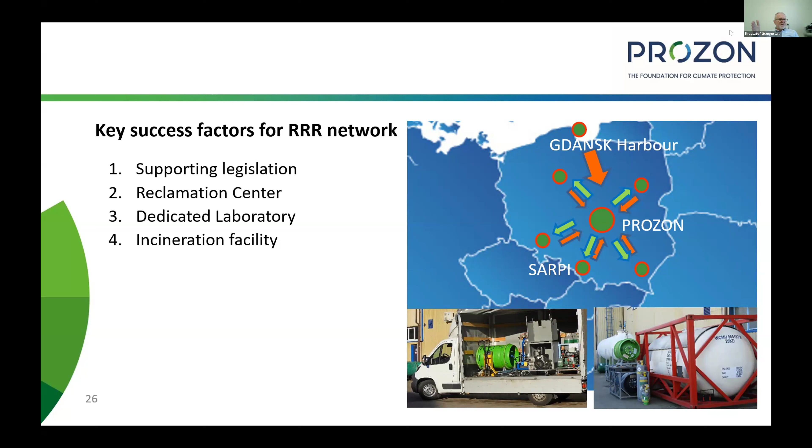By the way, I will use this moment to say what are the key success factors for 3R networks. I always say, even talking recently to some colleagues, no legislation, no reclamation. From our experience, we know basic legislation is required, and this aspect was also strongly elaborated in the Daikin presentation. Reclamation center, dedicated laboratory, and incineration facility - we have all those four components necessary in Poland, luckily.

Pool of equipment for recovery - I believe in my country there are thousands of recovery machines and several thousand special cylinders for recovery. Collection points help; on the pictures you can see some points around the country collecting refrigerant and sending it to the reclamation plant. It's treated as dangerous waste, but we still handle this, and even with this tough regulation, we don't have too many problems transporting and handling it. So logistics is always necessary.

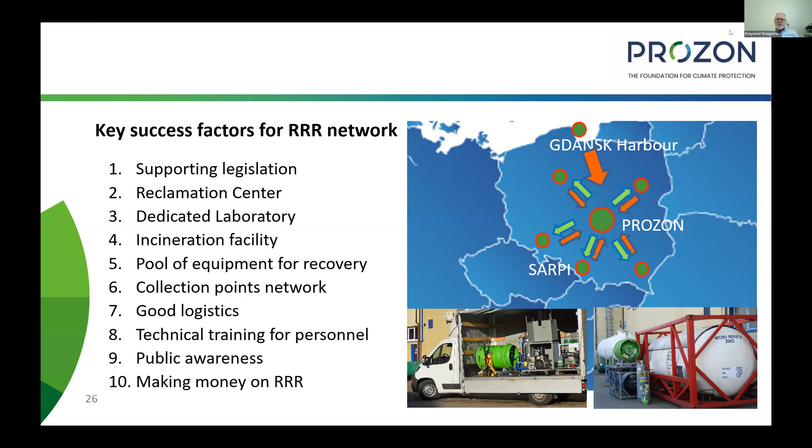Technical training for personnel, that's quite obvious. People, I mean the operators and users, have to also understand what's in their equipment. And all this system should be related to some profits for the beneficiaries and stakeholders of the process.

Coming back to what we can do with products from countries that do not have the full opportunity to manage refrigerants: we can import via sea to Gdańsk. Then we offer testing services, and based on the lab test, we can classify the product for different processes.

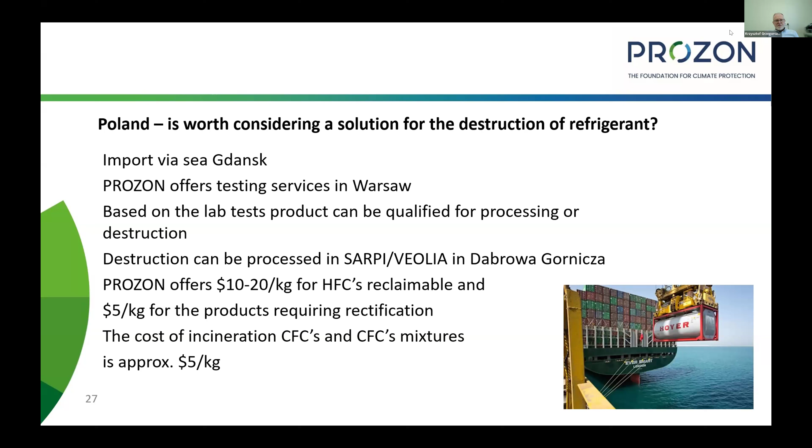Destruction is processed by Sarpi Veolia. Prozon is collecting refrigerants, and for most refrigerants recovered, we pay something around $10; in extreme cases, we go above $10. But the product has to be reclaimable. If the product requires more expensive processes like rectification, then the payment is smaller, just $5 per kilo. And when talking about the cost of incineration, it's a cost, not a benefit.

To make it more clear, due to European regulation and quota systems, all refrigerants now reach very high prices. Because of this, if we can do reclamation - reclaim the product - we pay a company bringing the product to us more or less $10 per kilogram. If this has to be separated and then reclaimed, or the other way, then it's a benefit of $5. And destruction costs $5 per kilo.

I've seen in some documents from Natasha that show a cost much higher, above $8 per kilo, but I believe it can be even lower.

So the final conclusion from my thoughts is that for countries not having full infrastructure to handle refrigerants, Poland can be a good option. If the product can be reclaimed and still go back to the market - I'm talking now only about HFCs - then the money received for the product can cover collection and transport costs. And this is the concept, actually. This is the point of my presentation.

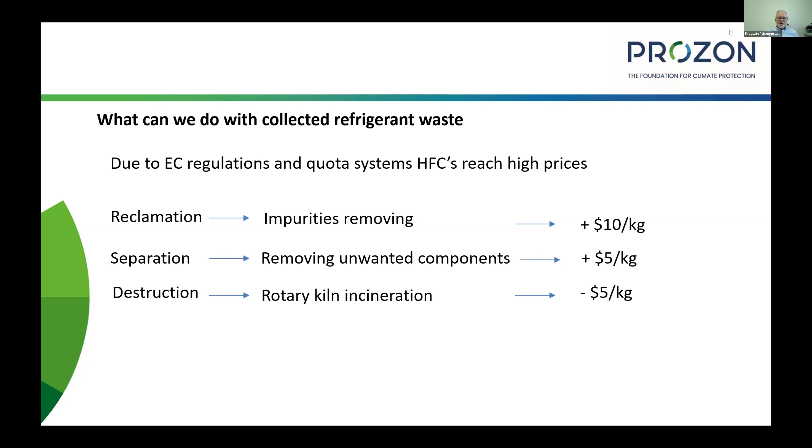So we came to the point that finally I will say a few words about Prozon, and I will give a stage to the questions. We are a foundation, a self-financed non-government organization. We started more than 27 years ago, and we are fully dedicated to the air conditioning and energy sector. We work with 3,000 companies, not only in Poland.

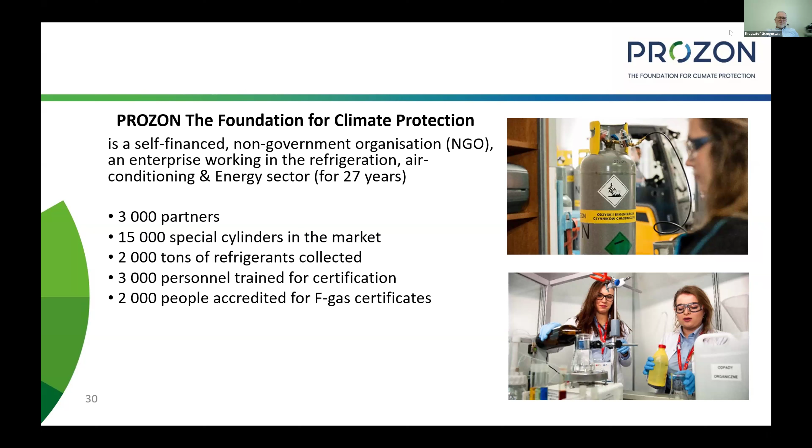Several thousand special cylinders we put in the market. The history is more than 2,000 tons of refrigerants collected, 3,000 personnel trained - I mentioned certification and the need for training, so we are also a training center. We also do accredited examination for other training centers, and we work for the energy sector, training people with SF6 certificate. More than 60 employees now work for Prozon. As a foundation, we report to the Ministry of Environment and Climate.